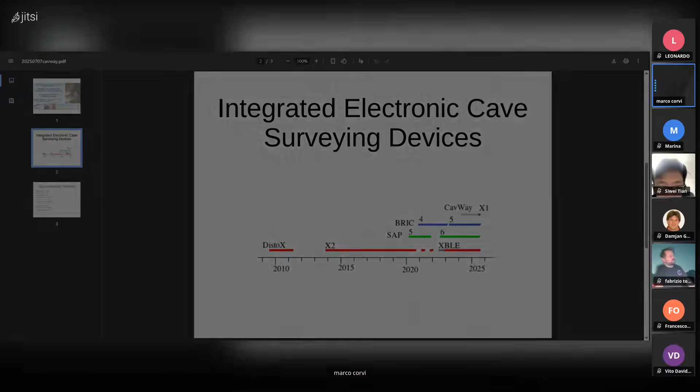Okay, Siwei, it's to you. Okay, thank you, and I will try to share my screen. Let me see where to share it. Sorry, which button? Third one. Three button. Okay, I'd like to share the whole screen.

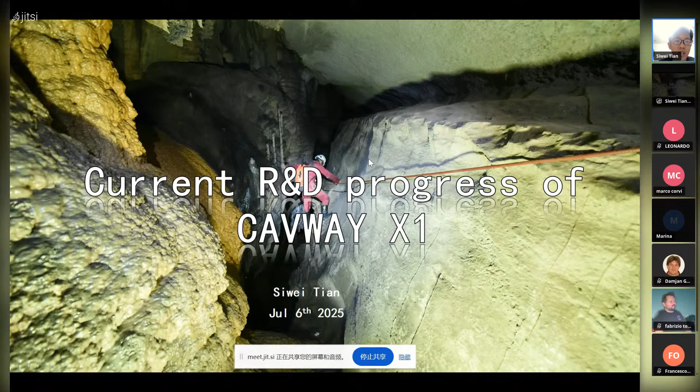Okay, then I begin. My topic today is the current research and development progress of the new Cavway X1. As we all know, I have spent a lot of time on this new project, maybe more than 2 years. I began this project in 2023, and the first slide is self introduction.

I'm a skilled electronic engineer for 15 years, and I developed the DistoX BLE board, and I'm also a member of the volunteer team of Fangshan Global Geopark. I began the development of Cavway X1 in 2023, and this project has taken me a very long time because I faced a lot of difficulties.

I don't want this new device to rely on any third-party product like DistoX. So I designed the PCB, I also designed the structure, the case, and a lot of silicon parts. Everything is designed by me, and in the end, I have to put everything into production by mold, not homemade, not 3D printed. So this took me a very long time to do it.

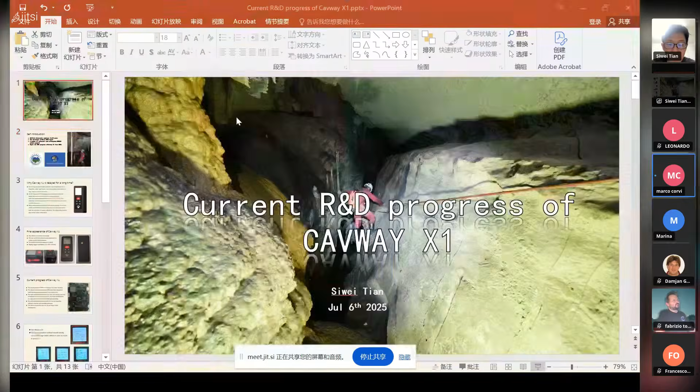Excuse me, Marina has raised a question. What's the problem, Marina? It's not me. It's not you. No, it was a rumor, a mistake. Okay, okay, I go on.

You have to introduce Marco. And why Cavway X1 is delayed for a very long time?

Firstly, I estimated maybe I can put the device into production in spring of this year, but finally, due to my personal health problem, I got hospitalized for a very long time, nearly 2 months. And after I got home, I can only work less than 4 hours a day. I have to rest most of the time.

That's why the device is delayed for a very long time. Another reason for this delay is I faced more difficulties than I expected. As the Cavway X1 is designed to be a complete industrial-grade precision instrument, everything is manufactured in modern factories. It's not homemade, everything needs a mold to put it into production, and mold development is not easy, it always takes a very long time. For example, the keypad is made of silicon, and the USB plugger, the upper cover, upper case, down case, and the filter glass, and the top glass part of the screen, everything has to be customized, designed, and produced in a factory by molds.

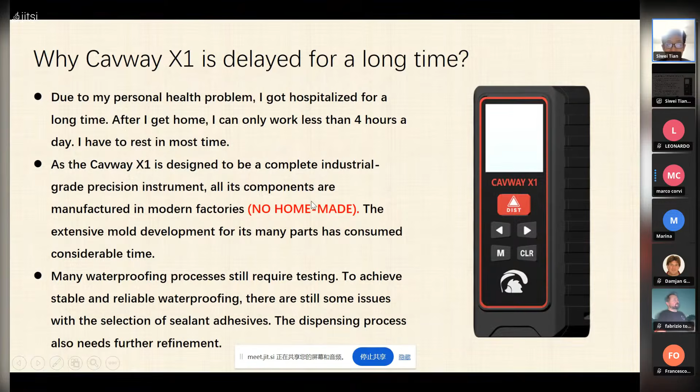And may I go on? Next slide, yeah. Okay, and this is the final appearance of Cavway X1.

We can see the right two photos of this device. This is the upper side, and this is the bottom side. On the bottom side there's a screw, by which users can connect the device to a tripod. We can see the second photo from the left, there's another screw on the rear side of the device which can connect to a small tail to enable more precise measurements.

And the device is slightly bigger than the DistoX, but I think it's almost the same size, just a little bigger.

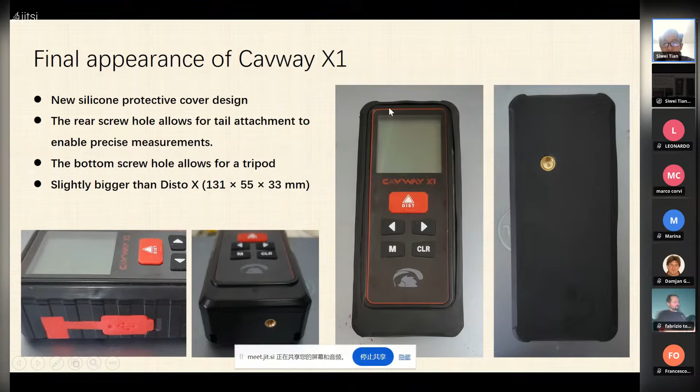Okay, and here's the current progress of Cavway X1. I have already finished the PCB and firmware development for a long time, and I have been concentrating on the design of the case, waterproofing, for nearly a year. Achieving a very reliable waterproof grade is not an easy thing.

I also put some of the parts into production. For example, the silicon buttons and the silicon USB cover, the USB plugger, have completed development and are now in mass production. And the main housing, including the two parts of the main housing, the top cover and the bottom case, has completed initial mold development and detail modifications.

And now, the ways to achieve reliable waterproofing - I'm still testing the main housing because there's some dispensing issue, and also the selection of the glue is another topic. I am currently in discussion with the factory, assembly factory. We are talking about adhesive selection and assembly process, and the silicon protective case has not yet begun mold development.

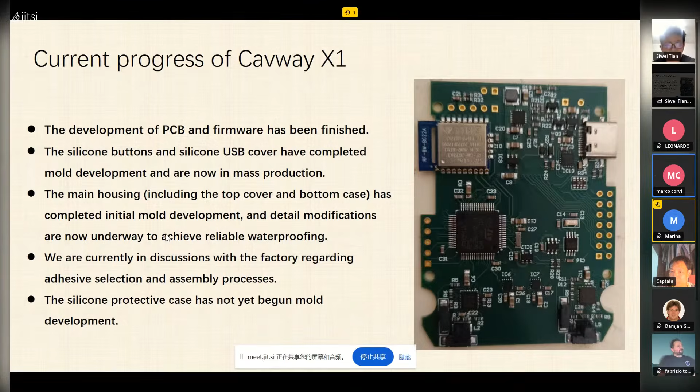And here's some user interface of the Cavway X1. The Cavway X1 adopts a dot matrix LCD, which supports showing more characters and more content compared to the old DistoX. The basic operation method should closely mimic the usage habits of DistoX users as much as possible. If you are a skilled DistoX user, I don't think you need any extra time to learn the new device - you can use it immediately.

Yeah, that's a good idea indeed - just to put as minimum as possible change from what people are used to.

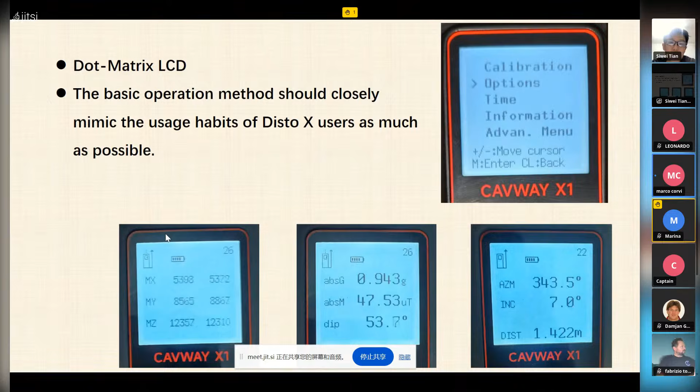Please continue. Okay, thank you.

And here's another user interface of the new Cavway X1. The Cavway X1 is equipped with magnetic interference detection, and this is the basic principle of this function: it mainly compares the MG vector magnitudes of the two sensors and DIP angles computed from the two sets of sensors, as well as the compensated MG vector of the two sets of sensors, and azimuth and inclination angles computed from these two sets of sensors. Because the Cavway X1 is equipped with two sets of sensors, it can achieve more reliable magnetic interference detection, and also can check if calibration still works. All three thresholds can be set for the comparisons.

I have used this device several times, and in my experiments I found this comparing principle is very reliable - when I put the Cavway too close to my headlamp, there will be an alert, very reliable. And if my calibration got lost, there will be a lot of alerts in every shot I made.

How close do you have to put it to your headlamp to get a warning from the Cavway? That depends on my headlamp. If I use the Fenix, maybe if I put it 10 centimeters away, it will get a warning. But if I use another model of headlamp which is more strongly magnetic, maybe 20 centimeters or even half a meter, I will get a warning.

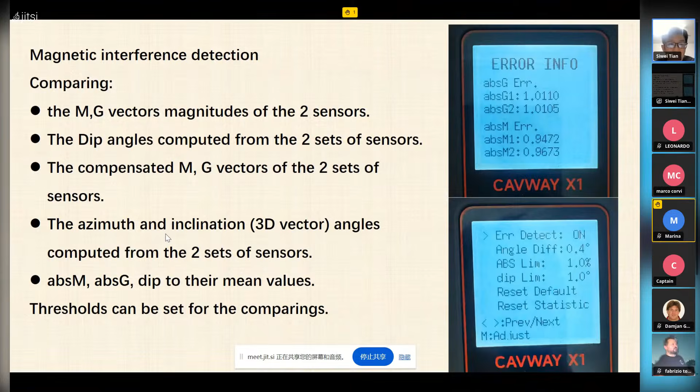There are some other user interfaces of the new Cavway X1. It's equipped with a historical data table UI. In the historical data table, users can check historical data. The left and right buttons can scroll through the historical data.

The shot is displayed in bold. You can see there's a shot. The bold shows there's a shot, and if there's an E, that means there's an accuracy error.

By pressing the M button, users can enter the detail page of each shot. We can see the data and why there's an accuracy error. If the ABS-G or ABS-M exceeds threshold, or there's a big error from a difference between the two sets of sensors, there will be an accuracy error. Users can check why there's an E in front of an arrow in each shot.

Another advantage of the new device is a much louder shot alert sound. In DistoX, when there's an underground river in the cave, I usually ignore it or can't hear the beep, the double beep. But in Cavway, the double beep is much louder and comes with an LCD flash. And there's an accuracy alert - if data error exceeds threshold, there will be an alert.

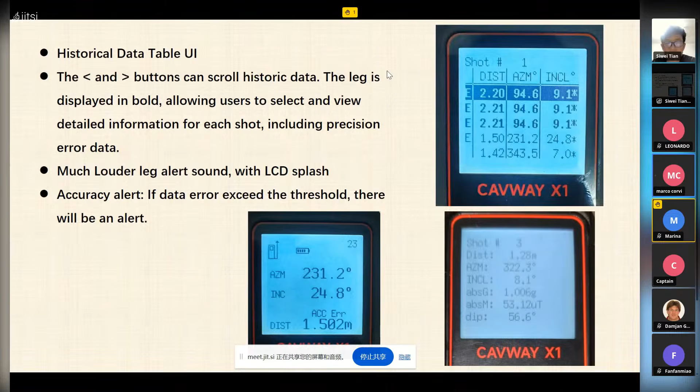Another very important upgrade of the new device is standalone calibration. DistoX has to perform calibration with a smartphone app, but with Cavway, it can perform calibration without any support from a smartphone. The traditional feature of calculating calibration parameters by smartphone has been retained, meaning users can do calibration the old way as with DistoX. I also thank Marco Corvi for developing the function in TopoDroid for calculating the calibration parameters.

Another very important new function is smart calibration assistance. With DistoX, sometimes the user always forgets the orientation they made, or maybe in one group they made 5 shots or 3 shots, which could make the calibration fail, and it would be difficult to find the wrong shots. In Cavway, there's a smart calibration assistance function.

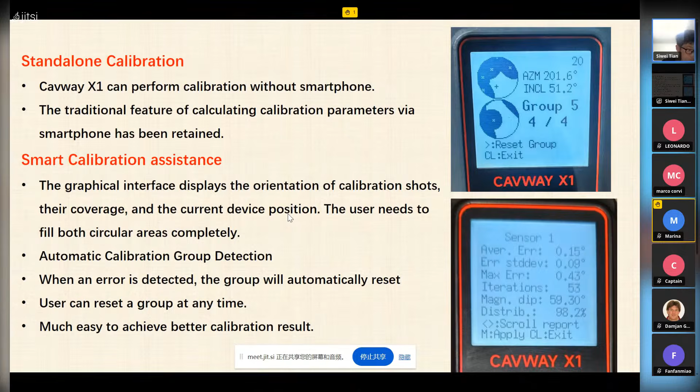Thank you for your translation. Next slide is my experiment made from January to March this year.

My experiment in January shows the new device is more robust against calibration loss and magnetization, because the internal structure layout of the Cavway X1 is fully optimized for geomagnetic measurement. For example, the DistoX is modified from Leica, but Leica's device is not optimized for geomagnetic measurement. For a device for geomagnetic measurements, all magnetic parts have to be put as far as possible from the magnetic sensor. So I optimized the structure layout for this new device, which enables the device to maintain calibration parameters effective for very long periods, requiring minimal recalibration.

Here is my experiment made in early months this year. From January 31st to February 1st, I calibrated the Cavway X1 in Zhangjiajie, Hunan province. Then I surveyed 1,811 meters. After a week, I moved to Fenghuang city, Hunan province, which is approximately 270 kilometers away from Zhangjiajie, the calibration place.

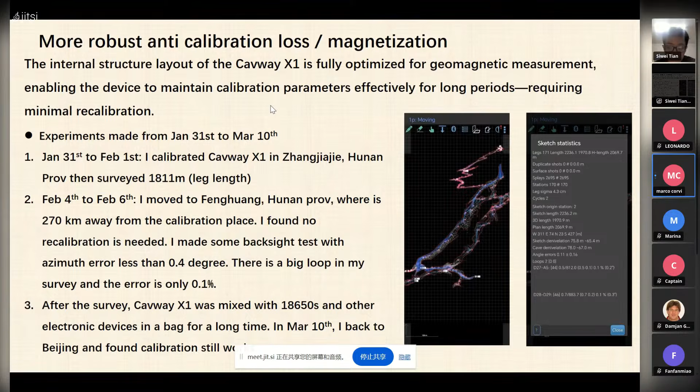Okay, thank you. And this is another feature of the new device. There's a Windows application called Cavway Assistant, which can make a firmware upgrade and data analysis.

Cavway Assistant firmware, as well as the communication protocol of USB and Bluetooth LE, can be downloaded at cavedevice.com. I only developed the Windows application for the new device because my time is always very busy and I don't have enough time for development on Macintosh or Linux operating systems. So I shared the communication protocol on my website.

So developers are very welcome if they have the ability to develop the application for another operating system.

All historical data, including the azimuth, inclination, as well as the original data of the two sets of sensors, can be downloaded. Users can analyze the data with the original sensor data, check the data accuracy, and even restore a survey if they find it isn't accurate enough. They can make a calibration at the end of a survey and use the new calibration parameters to compensate the old survey data to make it more accurate.

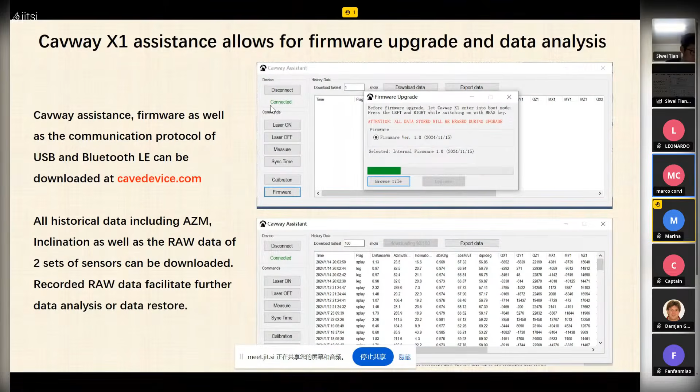Okay, and the last slide is about the release time. This is the question that probably everyone wants to ask. Yeah, because the device has been delayed for a very long time, mainly because of my personal health problem.

And also because you wanted to make it a good device. At first I remember you were planning to have something about 1 year ago, and then you made a lot of tiny details. You concerned yourself with very tiny details, for example where to put the hole for the tail screw so that it would be perfectly aligned with the laser, and many other things.

Right. And the symbol on the keypad as well, and also the user interface, the action of the user interface - a lot of tiny details that make the difference between a device and something that looks more professional.

When I visited you last year in October, I gave you a very initial version of the Cavway X1, and after I went back to China, I made a lot of optimizations on that version.